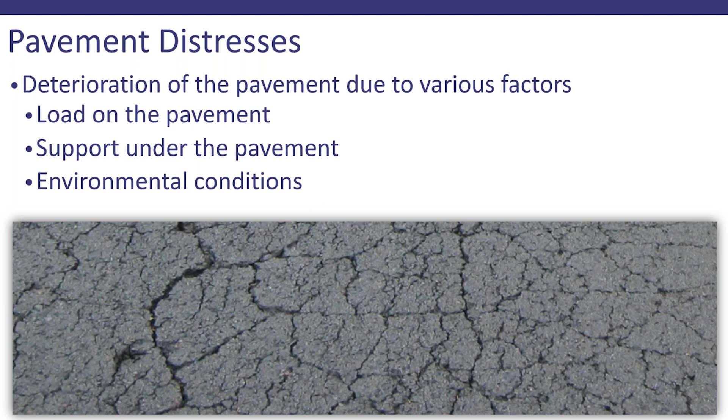All right, so we are going to be talking about pavement distresses and what to look for. As we know, when a new pavement is built, it's in great condition, or should be in great condition. And over time, that pavement is going to deteriorate to some extent. So there are a number of factors that contribute to that. One being the load on the pavement, so we put traffic on top of the pavement, that's a weight that pushes down on it. We're also dependent on the support from underneath the pavement that has to hold it up and carry that traffic load as well. And then we have environmental conditions that definitely play a big part in how long that pavement is going to last and what distresses show up.

So the first thing that they will tell you in any pavement design class is the most important feature of a pavement design is drainage, drainage, and drainage. I know some of you have heard me say that many times before, but drainage is probably the single most important factor in the longevity of a pavement, because water and pavements just are not friends. They don't mix, they don't do well together.

So you can see in the picture the types of distresses that we see. When we have a lot of water in that area, it softens the subgrade. It gets into those small spaces within the pavement structure, and we don't want that. So it causes a lot of deterioration. The first step in trying to combat those sorts of distresses is to deal with the drainage. If you have any type of distresses that you're trying to mitigate or repair, doing some type of corrective maintenance, if you don't first correct that drainage issue, you will see those distresses come back over time.

So when a pavement has any type of opening in the surface, water is going to get into those cracks. You can tell in this picture all of the cracks are highlighted really well. It's after a rain, but the crack areas are still kind of damp or darker looking from being wet. So right after a rain is a great time to go out and look at your pavements because it's easier to find those cracks and openings where water is getting in.

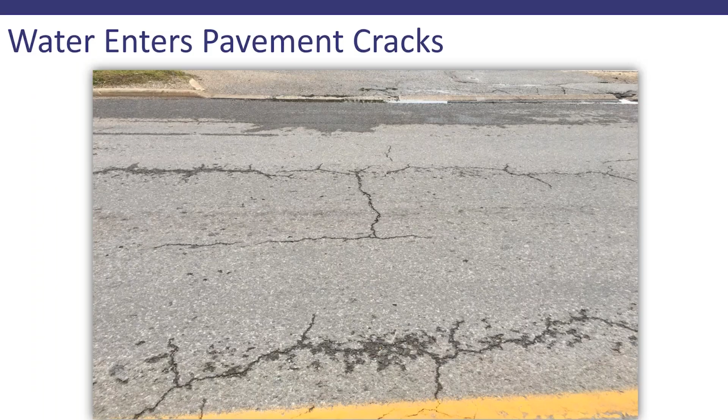Now, our pavement failure mechanisms, for the most part, asphalt is going to either crack or rut. We will also be talking today about concrete pavements, and concrete pavements crack. So those will be the main things we're looking at. You can see in the picture for the asphalt that we have both cracking and rutting in the same area.

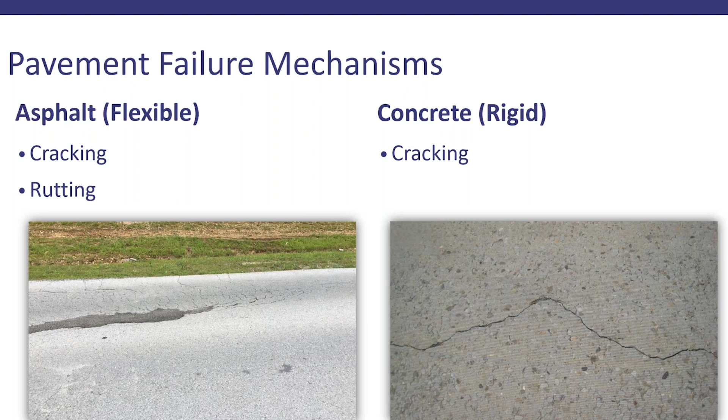So what that tells us is that when we look at the speed of deterioration, we can kind of be lulled into a false sense of security in that a new pavement does not deteriorate that fast. But once we start to see those distresses, they will kind of snowball on us and get worse a lot more quickly. So then we drop from that critical down into poor condition a little faster.

Now, every roadway is different, so we may have some that last a little bit longer, and we may have some that don't last quite as long. We're going to have to consider some major factors. If we have changes in our traffic levels, or if we have some really extreme weather conditions that year, that's definitely going to play a factor also.

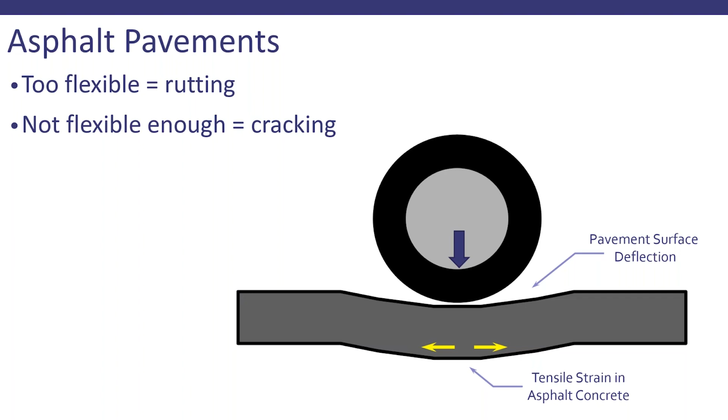Now, within our pavement structure, we have a number of layers. We have the surface, in this case asphalt. We will have some sort of a base material to support that. We might even have a subbase, and then below that we have the subgrade. Every layer plays a part in spreading out the load that we're applying from the traffic.

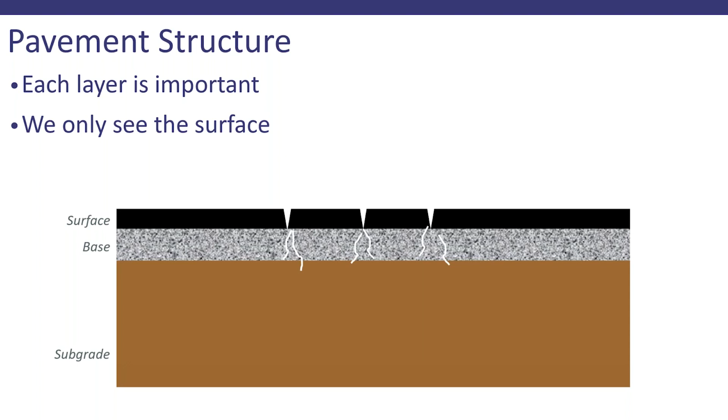But what we see is just on the surface. So if we have some things going wrong underneath the surface, it's hard to tell, because you can't see it—it's covered up by that surface layer. But when we start to get cracks, those are openings in the pavement surface that are going to allow water to get into that entire structure. So the openings get a little bigger, and we see water infiltration into those layers.

It goes further and deeper into the structure, and then we start to see things like subgrade failures or base failures. Those are kind of what we don't want to see, because the problem goes all the way through the entire extent of that pavement section. It's not just the surface that needs to be fixed, but the part we see at the top is the easiest to get to, and that's kind of what we want to be able to fix. So the sooner we can get to that cracking and keep the water from getting down and destroying that subgrade, the better off we are.

So those repeated bendings lead to cracking, and repeated deformation leads to rutting, and you can see how that will affect all of the layers of that pavement structure. So water's getting in and causing all kinds of problems.

Now, in trying to identify what those problems are exactly, we need to look at some type of pavement rating scale. So what is the condition of my pavement? How can I judge that condition? Well, there are lots of ways—some of them are really simple, some of them are really complicated.

There is a PCI, or Pavement Condition Index, that is outlined in a specification, ASTM D6433. What this does is step you through the process of rating your pavement on a scale of 1 to 100. So 100 is good, just like grades in school—the higher the score, the better. And so we're hoping to have higher numbers; we don't want to see those lower ones.

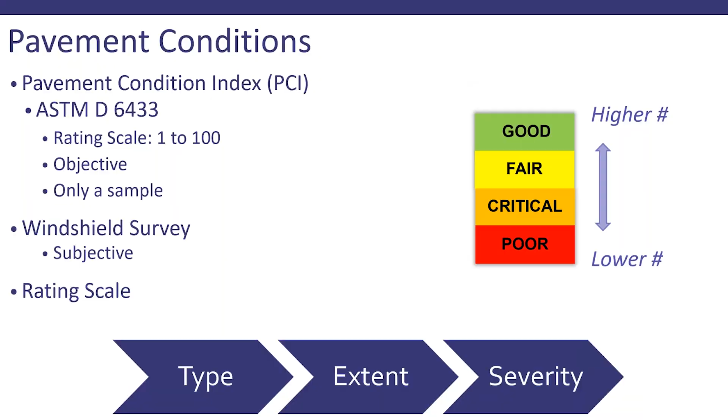Now, how do I get this data? We need to collect quite a bit of data, so I could go old-fashioned and get a clipboard and paper and pencil, take a tape measure out and start measuring some of this stuff, and that's a great way to do it. It's very valid.

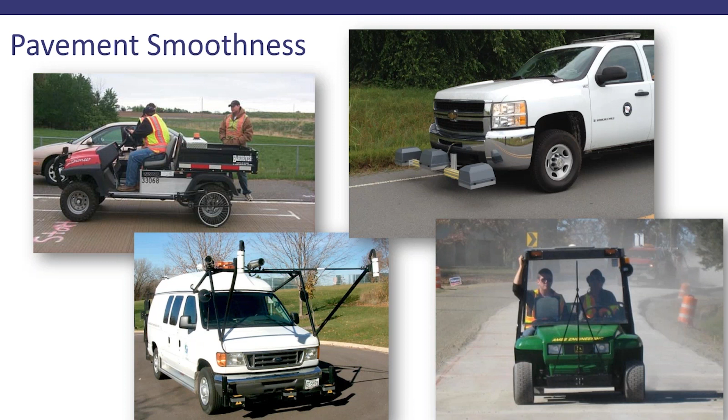Now, again, we've got to figure out what do we want to do, how do we want to collect our data, and make sure that it makes sense. If you want a very high level of detail, that's great - for instance, a state network. If you're a large municipality with lots of high traffic volumes, it's, I would say, definitely worth it. It's more expensive, but you get lots of data.

There is some danger in having too much data. What do you do with it all? Who's going to manage it? Who's going to monitor that? Who knows what to do with it?

So make sure that if you are paying the higher price for the more intensive details, that you have a plan to actually use that.

Now, at a lower level of detail, maybe your local networks that have a lot of low and medium type traffic levels, you can save some money. It's much less expensive. You don't get as much data, but maybe it's enough for what you need.

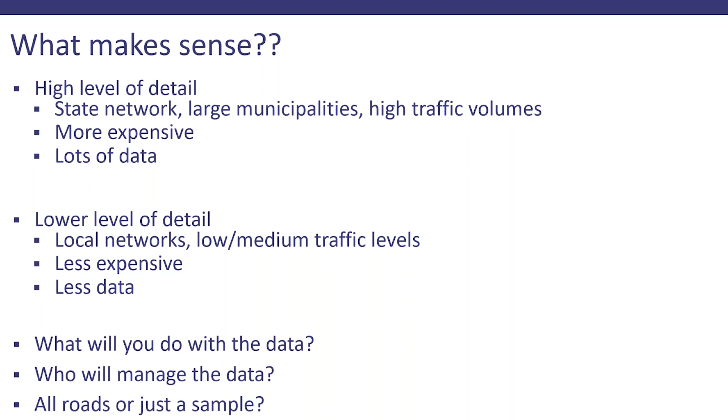So just make sure you think through the process of what you plan to do with the data, who's going to manage it, are you going to test all of your roads? Do you think that it's reasonable to just get away with a sampling of those roadways and all those types of things? Because the most important thing is that if you're going to go to the effort to do all of this, because it's not easy, you want to make sure that it is fruitful and productive and helps you make good decisions on how to improve your roadways.

Hey, at this time, let's stop and see if there are any questions.

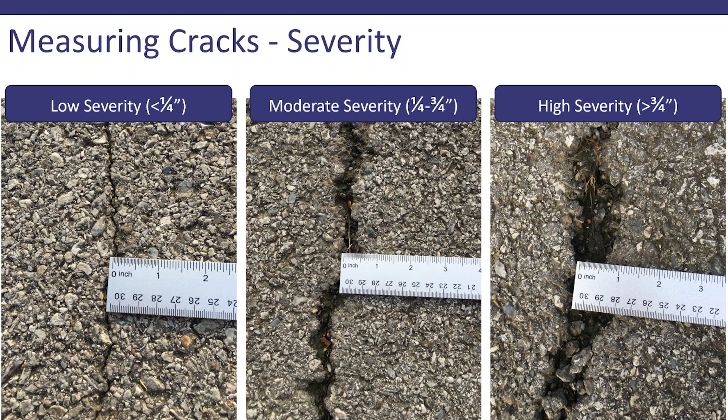Now, during the year, as the temperature changes, that crack width will also change. So that's something that you would also want to keep an eye on. Those cracks that tend to change quite a bit means that your pavement is a little more susceptible to temperature changes. So those close and open seasonally. Make sure that you're thinking about that based on the time of your survey.

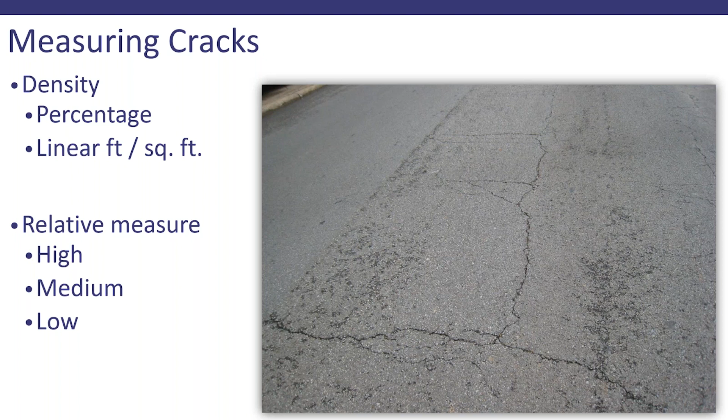And when we're measuring cracks, the density is going to be sometimes a percentage. It might be based on linear footage. It might be the square foot of the type of cracking that you see. And then we can also just kind of put it into a relative measure. Maybe we feel like it's good enough for us to just call it high, medium, or low density, and that's okay too.

Transverse cracking, those are cracks that are basically perpendicular to the center line. So they're going to run across the road side to side. But they're not going to be the ones that are caused by underlying concrete joints. That would be reflective cracking.

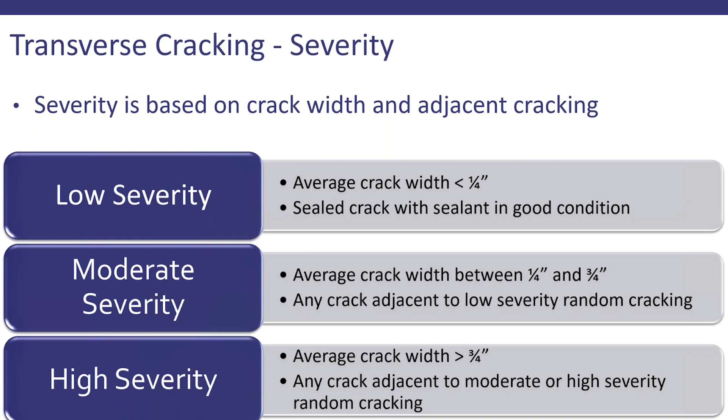So how are we going to measure this and keep up with it? We're going to record the number and length of transverse cracks, separate that by severity level, and rate the entire crack at the highest severity level present for at least 10%. The total crack length for a given crack is assigned to that severity level. So what we end up with is a listing or chart of how much we have at each severity level.

We're going to record the lengths of the cracks with sealant in good condition. Just for context, generally the rule of thumb is that at least 90% of that sealant must still be in good shape.

If the transverse cracking extends through an area of fatigue cracking — sometimes you'll see a transverse crack across the road, but then there's a spot that's got alligator cracking or fatigue cracking — then the length of the crack within that fatigued area is not counted, because we're going to count it with fatigue cracking, which is considered a worse type of cracking. And anytime you see a crack less than a foot long, we're not going to worry about that — that one does not count.

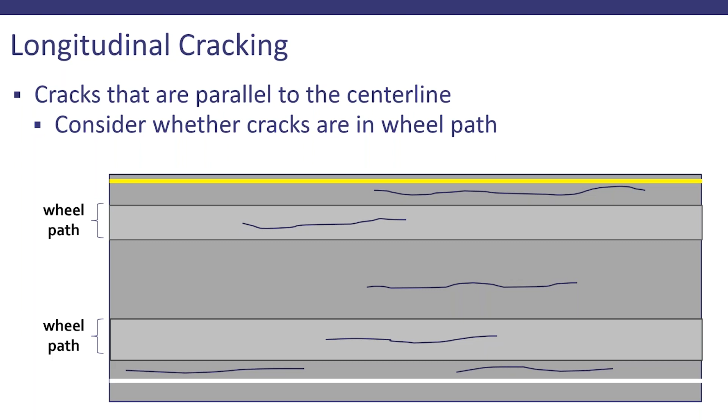Next we're going to look at longitudinal cracking — these are cracks parallel to the center line, so they run long ways down the road. The biggest thing to consider is whether those cracks are in the wheel path or not. If they are in the wheel path, they're more likely to be load related, because that's where traffic sits and where the actual load is applied. If they are not in the wheel path, it's going to be more of a non-structural issue.

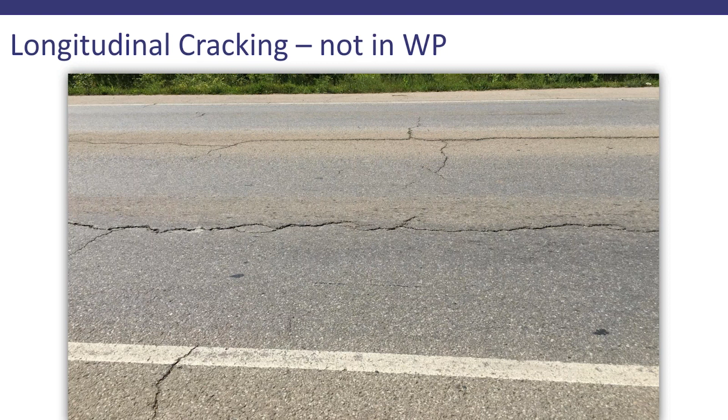Now for longitudinal cracking, we've got kind of the same scenario. Low severity is less than 1/4 of an inch, same deal with the crack sealant being in good condition. Our moderate severity will be 1/4 inch to 3/4, and high severity is more than 3/4 of an inch wide. And then we have some considerations of that crack being adjacent to random cracking as well.

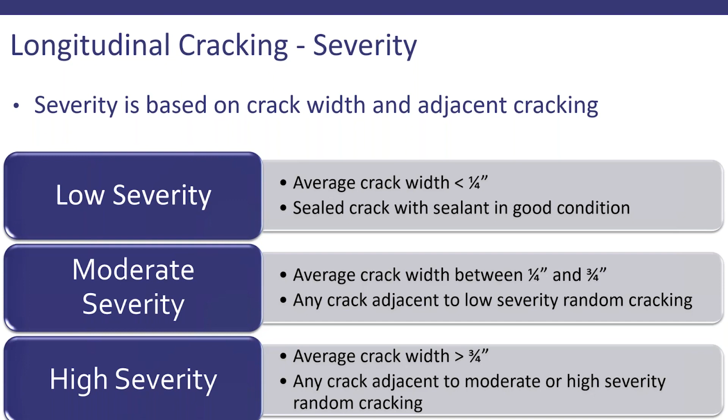When we're looking at longitudinal cracking, we're going to look at those that are in the wheel path and record the length of those cracks, separating that by severity level. Any longitudinal crack associated with random cracking, meaning cracks running in different directions, is more like alligator cracking, so we're actually going to rate that as fatigue cracking, separating it out from the longitudinal portion.

If it's a longitudinal crack that meanders quite a bit and has a quantifiable area, we're also going to rate that as fatigue cracking. If it's outside the wheel path, we're going to record that separately, again recording the lengths and separating by severity level.

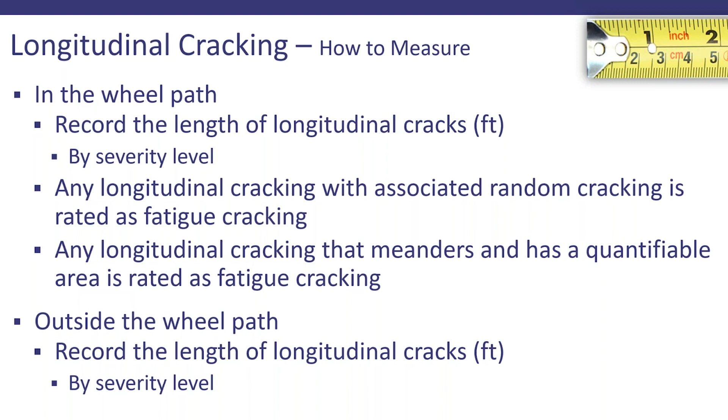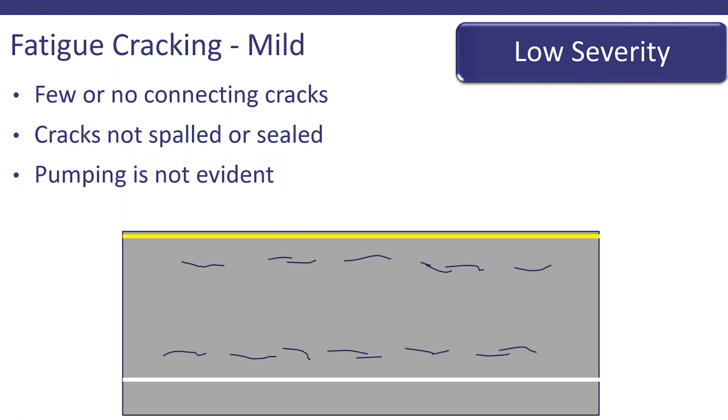For moderate severity fatigue cracking, we're starting to see some of those interconnecting cracks forming a pattern. The cracks may be slightly spalled, meaning the edges of those cracks have broken so it looks deteriorated—not a clean break, kind of mottled. Those cracks may be sealed, but again we're still not really seeing any pumping.

For our more severe level fatigue cracking, we've got interconnecting cracks forming a very obvious pattern. It starts to look like an alligator, so that's why a lot of folks call it alligator cracking. These cracks may be moderately or even severely spalled, may or may not be sealed, and at this point there's a higher likelihood that we are seeing some pumping.

Here's another example. This is some pretty defined alligator cracking, so severe level fatigue cracking. Again, we do see the evidence of that subgrade material being pumped through to the surface, and after that pavement dries, we're left with that residue, so it has a dirty look to it.

Here's one where we do not actually see pumping, but that is some extreme fatigue cracking over in that lane—lots of interconnected cracks.

In terms of measurements and how we record this, we're going to report it in either square feet or square yards, separating that by each severity level. If you're doing that and really can't figure out which is which, or maybe part of it looks medium and part looks severe, go ahead and rate it worst case—the highest severity level that you see in a particular section, go ahead and assign that.

Fatigue cracking is interconnected cracking, but it's very much related to a load-based problem. Block cracking is kind of like that in that those cracks are interconnected, but it's not necessarily load related. In fact, it does not start out that way at all, but it's more of a block shape.

You'll see some squares, and it's not going to be super straight lines, but you'll notice a pattern of similar size, either squares or rectangular pieces that are kind of separated out. Those blocks can be anywhere from 1 square foot up to a 10 by 10, 100 square foot block. It just depends on the pavement.

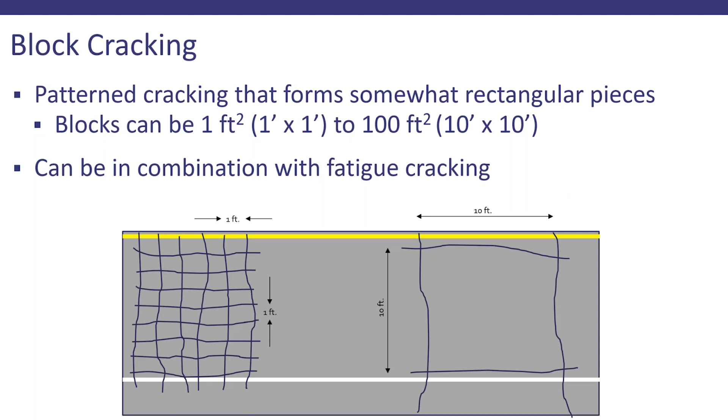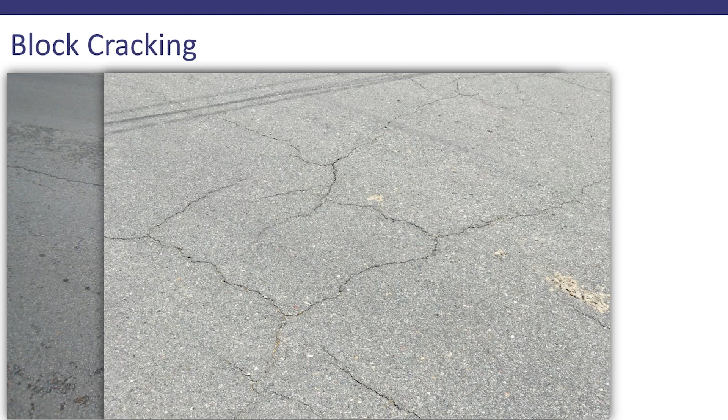In some early stages of block cracking, we start to see a little bit of that non-structural longitudinal cracking. We see transverse cracking, and then a more regular pattern develops, but it's not isolated within those wheel paths. It's important to watch this over a period of time and keep up with it, not just check it once and be done, but get an idea of how it's changing and modifying.

I think the most typical size blocks are going to be 2, 3, 4 foot by that same size, so kind of in between those extremes that I showed you on the diagram in the previous slide.

For block cracking, our severity level is going to be based on the crack width and the adjacent cracks, much like what we've seen before. Average crack width for low severity is less than 1/4 inch. These may be sealed, which means you can't really see it to figure out the width, but sealant being in good condition is a good thing. Moderate and high severity, again, is going to be based on the width of the crack as well as that adjacent random cracking.

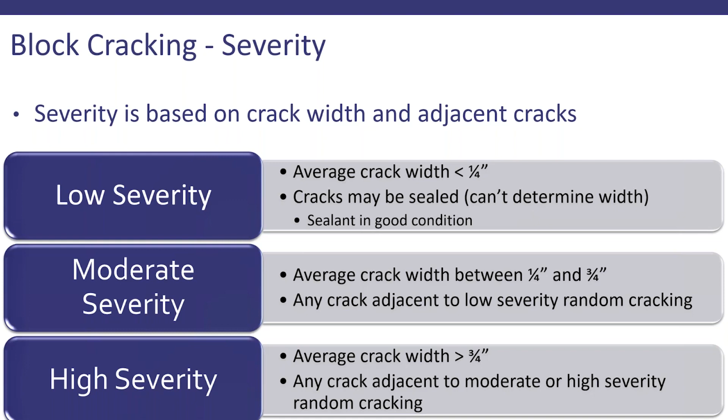Now, how do we measure block cracking? We're going to record the square feet or square yards at each severity level, but one caveat is that to consider it block cracking, the length of the affected area should be at least 45 feet long. So if you have just a very small spot, maybe 10 or 20 feet long, that looks like block cracking, that's not actually going to count as block cracking unless it's consistent over at least 45 to 50 feet.

If you have fatigue cracking that is also in that area, you're going to reduce the block cracking area by the area that's fatigue. So you're going to have to separate out which part you call block and which part you call fatigue.

Right now, reflective cracking — we've already mentioned this one. This is where you might have an asphalt pavement on top of an older concrete pavement that was jointed, and those cracks from the joints reflect through. So we need to know how can you tell the difference between transverse and reflective cracking? Sometimes it's really easy, sometimes it's not so easy to tell the difference.

If you have some information on the construction history and you know it used to be a concrete pavement, that is wonderful information to have, but you don't always have that. When an asphalt surface is placed on top of that concrete, whatever gap is underneath it is a break in the support, and that weak point is why it will always reflect through. Usually there's no magic that will fix that; you will always have it. There are some treatments that can slow it down, but nothing that's a magic fix.

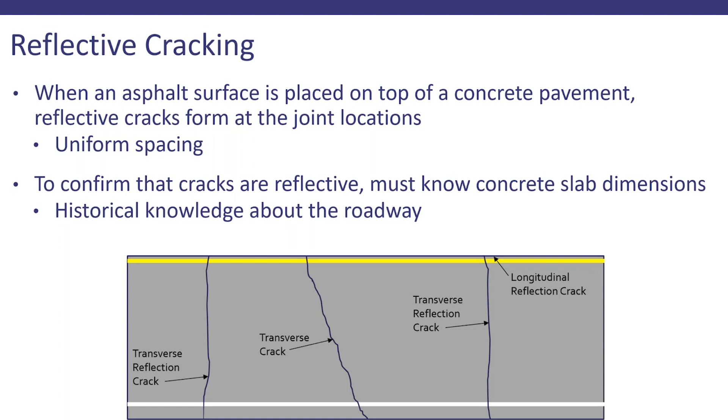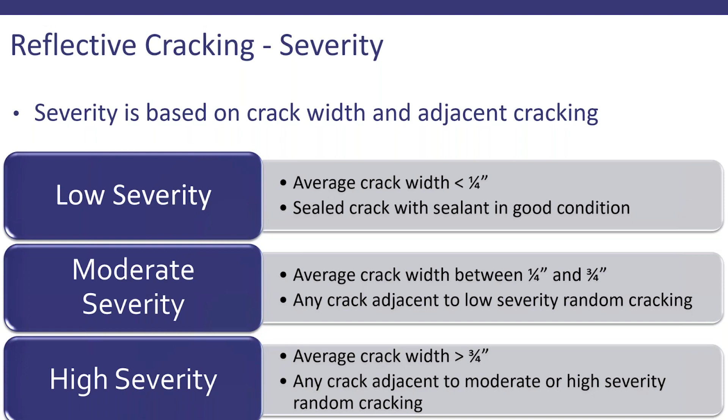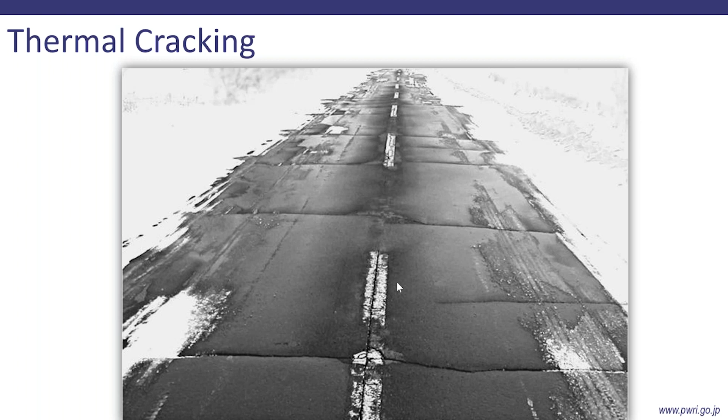And then we might also see thermal cracking. This is cracking that occurs due to temperature changes, and really just the shrink and swell of that ribbon of asphalt as it moves through that area. A lot of our designs over, I would say, the last 20, 25 years, once we started using SuperPave and paying more attention to the temperature ranges for the binder, we're seeing less of the really true thermal cracking issues.

We might also see edge cracking. This is something that is going to apply to the pavements with unpaved shoulders. Usually it's going to show up as kind of a crescent or a little bit of a curved breaking off section right at the edge of that pavement, because when we don't have a paved shoulder, we don't have that lateral confinement or lateral support. So it's easy for that edge to kind of crack and break off. But we're going to classify those for anything that is located within 2 feet of the edge of the pavement, and this will include longitudinal cracks that are outside of the wheel path.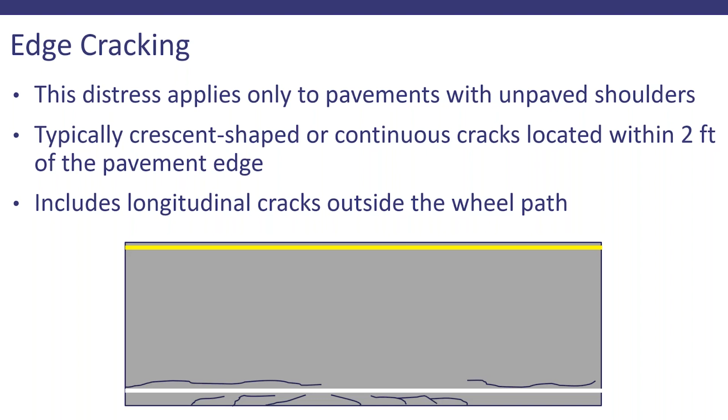Low severity for edge cracking is going to include cracks that don't have any breaking. There's no loss of material yet; we're just seeing that the crack is there. Moderate severity will be where the cracks are starting to break up a little bit, up to maybe 10% of that affected length might have lost some of the material. And then when we're losing more than about 10% of the edges, we're seeing chunks break off of that edge, we're seeing a lot of breaking up — that is going to be considered high severity.

So you can see kind of what that looks like. We do have a little bit of breakup there. We're going to record edge cracking in terms of the length of the affected pavement edge — how long of a span is that problem happening. We're going to have that separated by severity level.

Okay, and here's one that has quite a bit of breakup at the edge. None of that is so far that it's over into the wheel path, so it is all considered edge cracking.

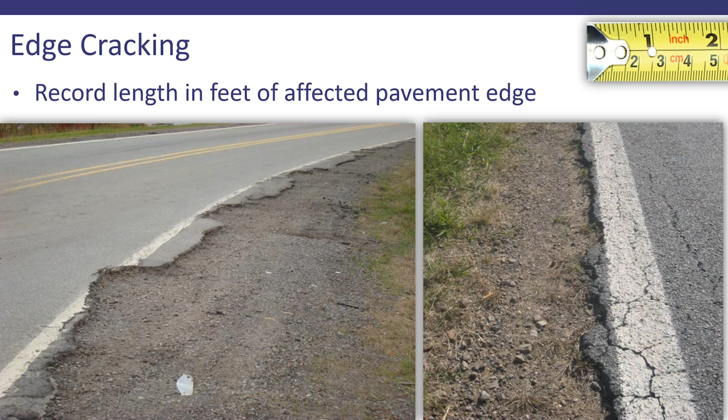Another thing that we might need to document on the edge of the pavement is that lane to shoulder drop off. When we don't have paved shoulders, we have the potential for a vertical differential there where that gravel or crushed material that's pulled up to the edge will tend to wear away, especially if we have traffic that's getting over on the edge and wearing it down. So when that difference in elevation is more than about 2 inches, there's a definite safety issue at hand. What we want to do is record that elevation difference so that we know what that is. So if you're seeing any significant drop-offs, make sure and record that.

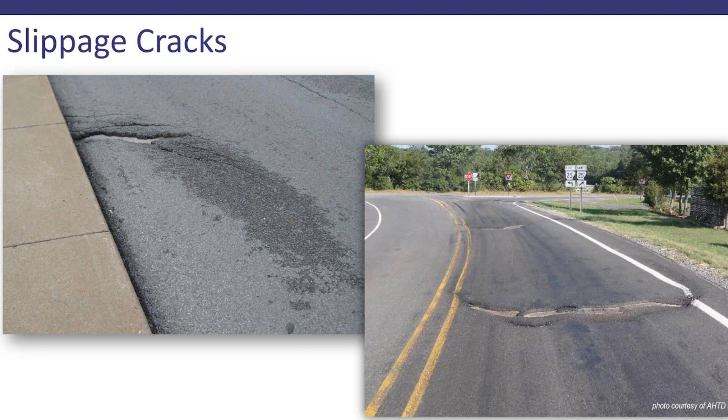This is a little more extreme case. We've got some tearing of the asphalt, and then a massive crack in the picture on the right, and you can see how that's holding water. So water is the enemy — this is definitely what we don't want to see on our pavement.

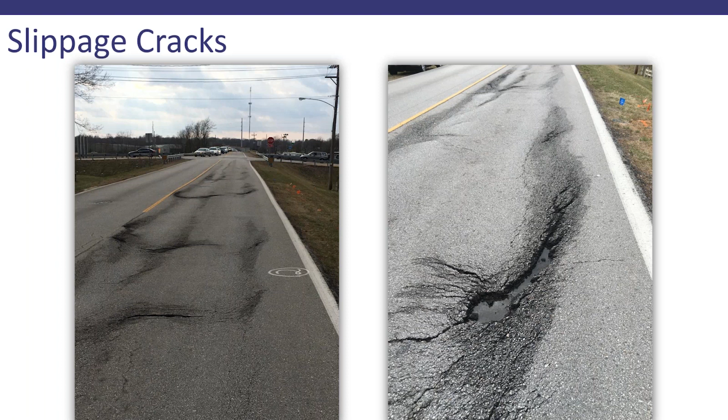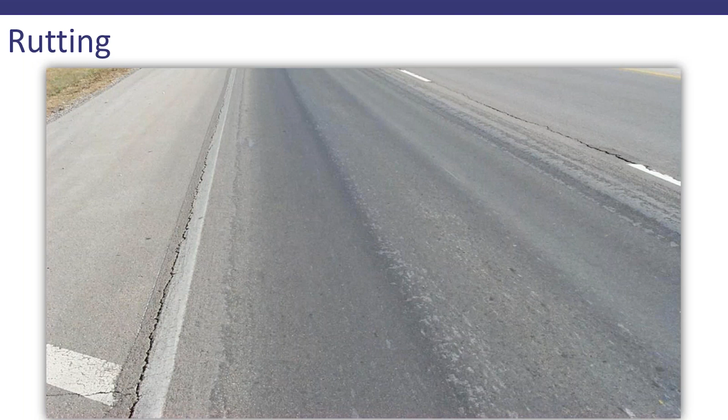All right, now let's talk about asphalt rutting. Rutting is pretty self-explanatory, we know what that is, but it will have some longitudinal depressions in the wheel paths of that lane. So you can see here some evident differentiation - it's not a smooth cross section of that roadway.

This is a more severe case of that. We've got some definite issues here. You can tell where the loads are being placed, and it's really just pushing that mix around and moving it. So we have some low points in the wheel paths.

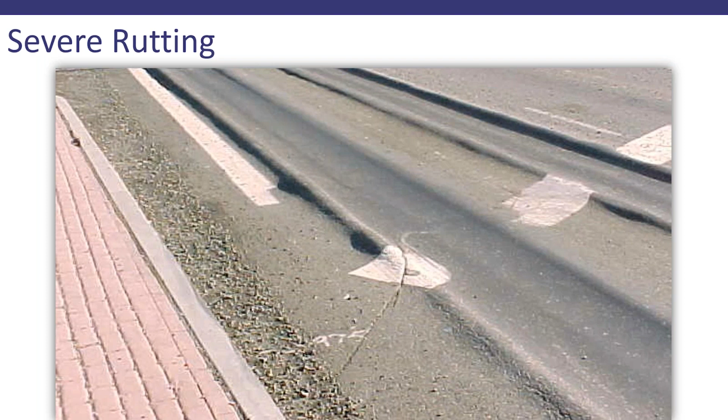Now, the two ways that rutting can happen: the first is in the subgrade or the base layer, and so really what happens is that the deformation happens well below the surface. So the subgrade might be weak, it might become soggy and saturated and a little squishy, and then we put that traffic load on it. And so we see that subgrade deforms, or it could be in the base layer where it deforms, but typically it's going to be in the subgrade. We specifically designed the types of materials that we're going to use for the base and for the surface, but we tend to use whatever's there in terms of subgrade because it already exists. So unless we do some type of a modification or improvement to that subgrade, we're really just using that natural resource. And a lot of times that will be susceptible to some deformation when it gets wet, especially if it has much clay in it.

Now, the other option would be that the subgrade's fine, the base is fine, but that asphalt mix is just a little bit too weak for the type of traffic that we're going to put on it, and it moves around. So in the case where we had - let me actually go back - in this, if you look at that original cross section with the straight line, everything that moved down to make the ruts went downward, nothing went up. On the other hand, if the mix is the problem, then whatever moves down here, it's going to hit something solid. It can't continue to go down, so it's going to move the mix side to side. So we have these extra heaps of asphalt that have moved to the outer edge of the wheel path.

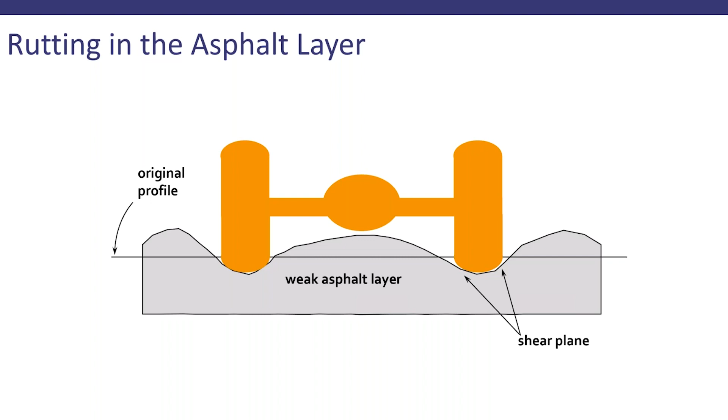Now, in terms of measurements for rutting, what we really want to know is how deep is that rut? Again, it is a longitudinal depression in the wheel path. Officially, severity levels are really not assigned because a rut has safety issues associated with it. So if there is a rut, water can sit in those areas of the pavement and cause hydroplaning, it could freeze - lots of things that deal more with safety. So officially, there are no severity levels.

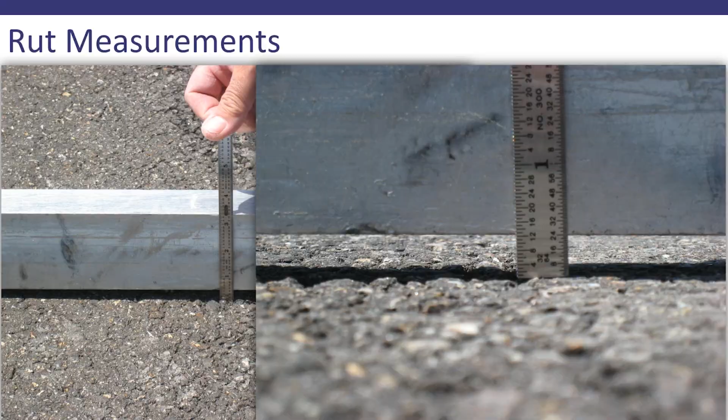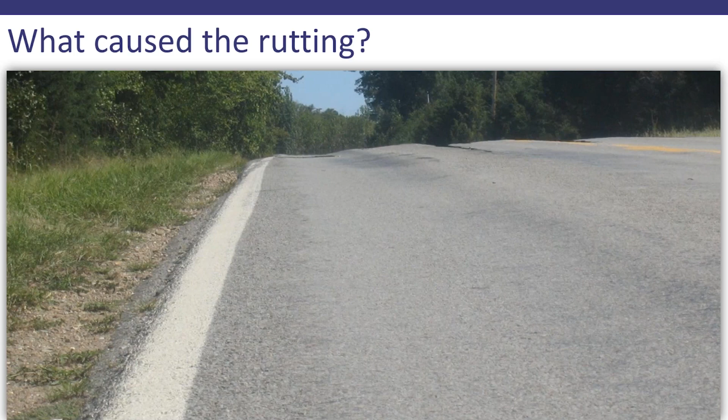Now, based on core samples, we also found that there was some subgrade issue, and we had to deal with that as well. So this is really a combination problem, but those are a couple of the things that you can see right off the bat in the picture that would identify mixture rutting. It's easy to tell you, with that line, here was the original profile, but when you walk out onto the pavement, that line is not there. You have to just be able to look at it and tell where it was originally, and that's not always the simplest thing to do.

A related distress that's kind of like rutting is shoving. This is displacement of an area of the pavement surface. That's usually when you have heavy traffic putting on the brakes or maybe accelerating, but they're doing something that's changing the forces on those pavement sections as compared to where there's just normal driving.

So this is really common to see on hills. You might see it laterally on curves and coming to an intersection. So as that truck comes down, it puts on the brakes and it's actually shoving the asphalt forward based on that friction.

In terms of measuring, we're just going to record the number of times that it happens and how many square feet it affects, because this is usually going to be an isolated area in a curve near an intersection or something like that. It's not going to be spread out throughout the entire traveled way.

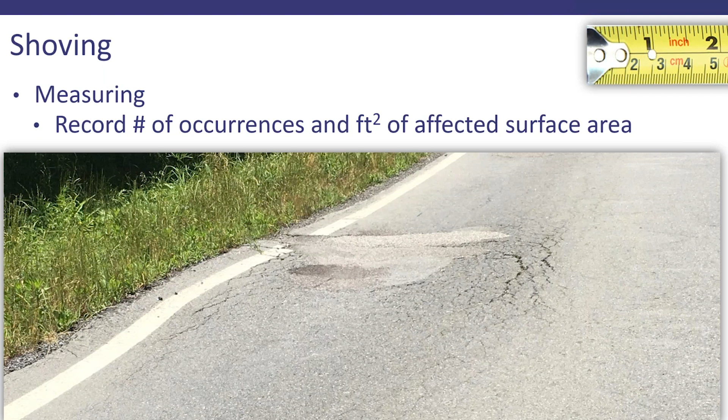Here's another example of shoving. You can see how the surface of the asphalt looks kind of lumpy. That is just the effect of traffic coming to an intersection. So you've got both the braking action and then also the acceleration. At this particular location, it's uphill as they're accelerating to take off from that stop sign, and at an angle that's pushing the asphalt around.

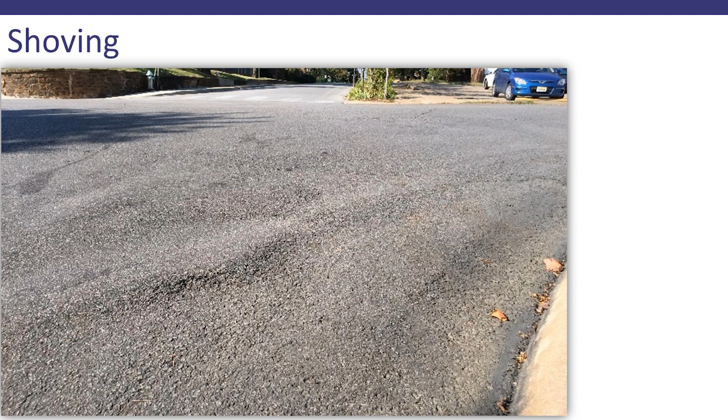And then another example here where we're going downhill in these lanes that are more on the left side of the picture. You can see some more extreme effect. It feels like washboarding, but it's just some shoving as you come down the hill, approaching a stoplight, and it always seems to be red right there. So everyone has to put their brakes on. They push the material forward, and then it just makes it lumpy, makes it rough. And then the rougher it gets, the more of an effect it has for the next bit of traffic that comes along. So it continues to get worse.

And then here's an example of lateral shoving in a curve section. The best way to identify this, again, is to look at the stripe. The stripe was not painted in a wavy format, but it looks that way now. So what's happened is traffic is actually pushing that mix around. It's not super stable. So for that, we're going to look at the square footage, figure out how much of that pavement is affected, and record it.

Now there are a few other asphalt distresses to look at. Bleeding and flushing - this is really just excess oil or binder. If your mix was too rich, compacted too tight, and that bled to the top, this can create a loss of surface texture. This is a safety issue, so we're really not concerned with severity levels.

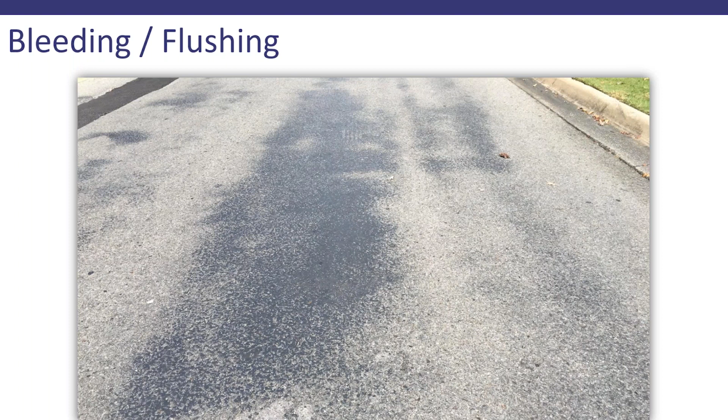In terms of measurement, we're going to record the square footage of the affected surface area.

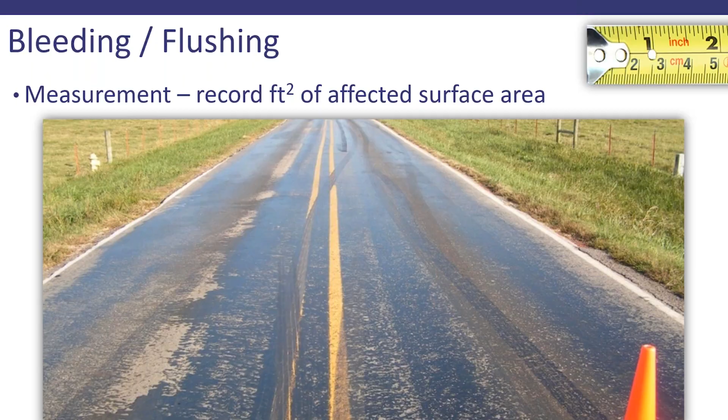Now, the biggest issue with the bleeding and the flushing is skid resistance. So rather than looking at something like a severity level based on a measurement of what it looks like, we can actually measure the skid resistance itself. There are a couple of things at play when we talk about skid resistance: one is microtexture, one is macrotexture.

So it's a relative measure that will tell you which pavements have more or less skid resistance. That really deals with the microtexture, which is kind of the grit and the grip of the aggregate particles themselves. Now the mix will have a macrotexture - there will be some little spaces, that bigger texture, which is why it's called macrotexture. But those are the spaces within the surface of that mix where water might be able to sit temporarily during a rainstorm to keep it from being right on the surface. If everything is super, super smooth, there's no reservoir area for that water, and so it's just going to come in contact with the tires. But if we do have a good amount of macrotexture, that water can live somewhere until it can run off and keep it from breaking the bond between the vehicle tire and the pavement surface.

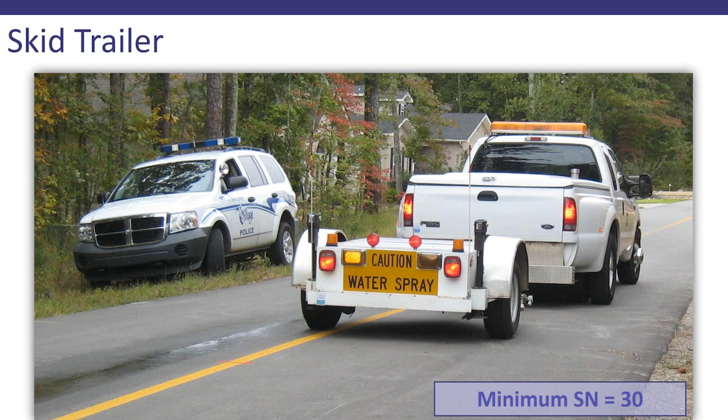So the motor gets it going. There's a hose to spray some water on the pavement, so it's like a wet skid test, and then it drops that fixture, and the rubber skids actually screech, so it will scare people out in the field when you're running this. But it will run, it will drop, and it will give you a skid number based on that wet test. It's a portable type of test, kind of cool. Gives you a good relative measure as well.

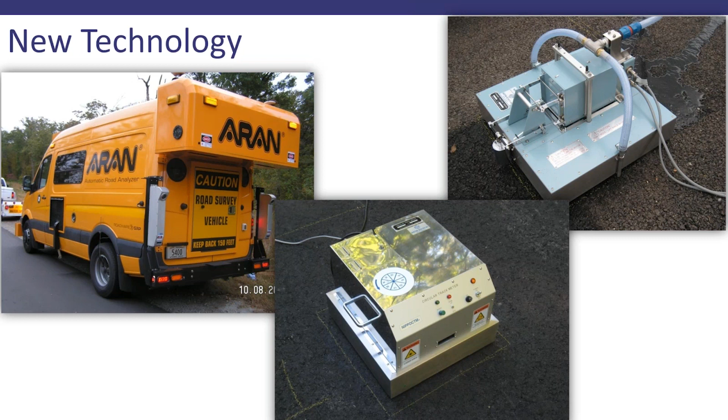Okay, another place where we might need to do some friction testing is when you see polished aggregate. This is where the surface binder has worn away, the aggregates are exposed, and we would like to think that our aggregates still have a lot of texture, both micro and macro texture, to provide that skid resistance. But some aggregates get smoothed off or polished by the action of traffic, so then we lose that friction. Again, we're not really going to look at severity levels here. We could do some skid testing and determine whether it's good or not good, but it's a safety issue, so we're not going to have a low, moderate, or severe.

When we have polished aggregate, we're going to look at the square footage of the affected surface area, and we're not going to count any sections. Sometimes we'll have something that's got preventive maintenance applied, or maybe we've got a crosswalk with some different texture. That part is not going to count.

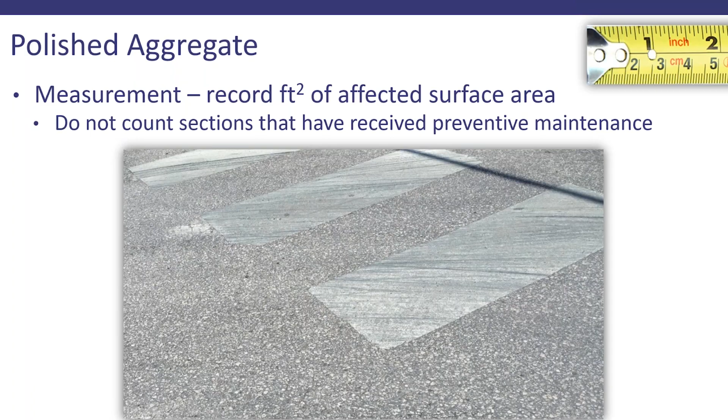We might have some pavement sections that exhibit raveling or weathering. This is where we have a loss of surface aggregate as well as binder. Sometimes we lose the fine aggregate, sometimes we lose fine and some coarse aggregate, and sometimes we lose coarse aggregate too. So it could be all of those things. But if you look at this picture, you can tell it didn't start out with that type of texture. We've lost some parts of that mix. So typically we'll see this in older pavements. Weathering just happens. It's out there for lots of years, in the weather, and then it does start to ravel and lose some of those particles.

When we're measuring this, we're going to look at the square footage of the affected surface area. We're going to make a note of the type of aggregate that appears to have been lost. But this is not something that we're going to rate on chip seals. Now, we do have raveling on chip seals, but when we're doing our pavement surveys, we're not going to worry too much about those details on that type of road. But you can see there are two different examples here in the pictures that have very different textures, and that gives you an indication of what types of aggregates are coming out of that surface.

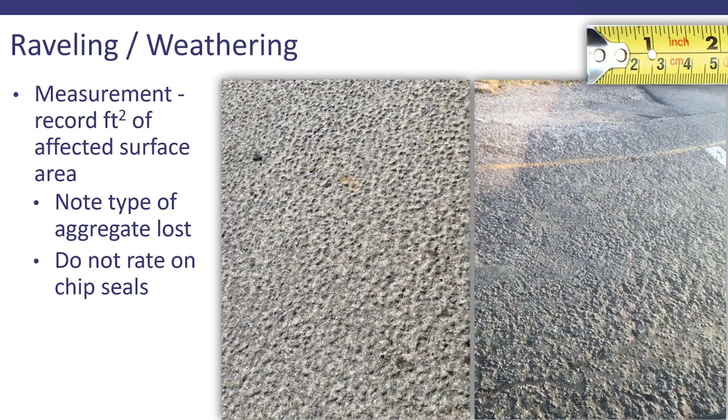And then you might see something that's very closely related. These are pop-outs, and this is where you're just losing those larger coarse particles. If that's happened over an entire area, it's going to have a really rough-looking texture. But just as a close-up here to see what that looks like, it looks like one big rock just sort of got plucked out of there, and that is exactly a pop-out.

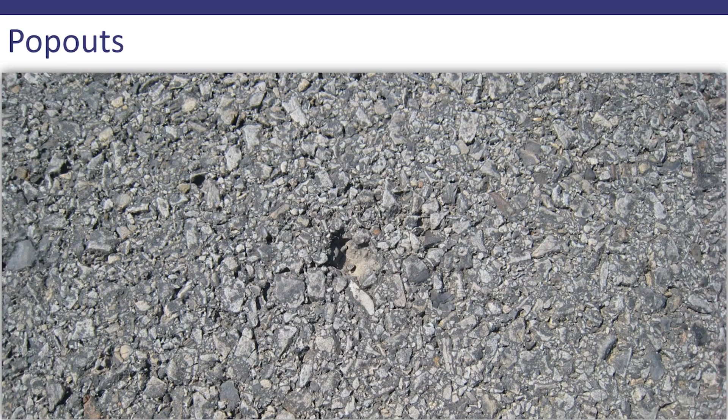Okay, we're going to need to note things like water bleeding and pumping. So if we see water seeping from underneath the pavement and it's coming up through those cracks, that's definitely something we want to notice. At that point, we've already talked about how some of those fines may come up through those cracks and be left on the surface, just kind of looks dirty. So we're going to measure the number of occurrences and how much length of the pavement is affected. And we're only going to count it if it's 3 feet or more. If it's just a small spot, we're going to ignore that.

Okay, so we might see that it's just water that's coming through, and we have to pay attention and know what kind of weather has been happening. If we see something like this, you need to know, did it just rain and everything else has dried, but there's more water near those cracks, which is what helps them show up. But if it's just that it rained and this has not dried yet, that's different from it hasn't rained in 3 days and this is still wet. That's an indication that water is pumping back up through from the bottom side. So it's a different action.

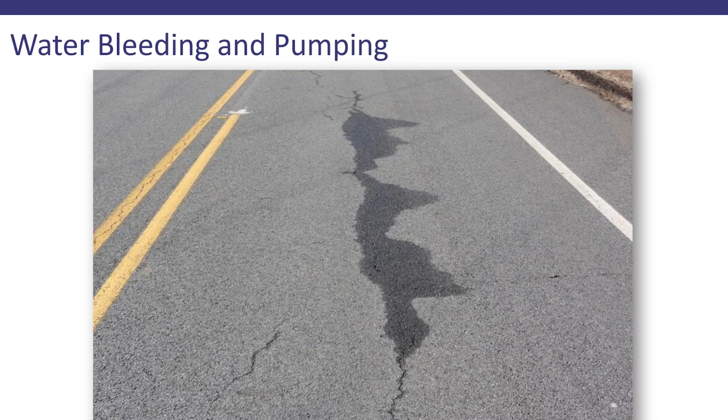Okay, then we're going to also measure potholes. This is kind of a bowl-shaped hole. Y'all know what a pothole is, but different sizes, different depths. Anything less than about a 6-inch diameter is not going to be considered, but we need to know the depth, because that's going to determine our severity. Low severity is less than 1 inch, moderate severity is 1 to 2 inches, and high severity is anything more than 2 inches.

A lot of times our potholes are dependent on the layer of pavement that failed. So if we had some fatigue cracking on a pavement with a 2-inch overlay, 1.5 to 2 inches is a typical overlay depth, and it's just that portion that has broken apart and popped out that leaves a pothole. That often indicates the severity, because if it's just that layer, it's probably going to be a moderate severity pothole. But if there's been more deterioration and it's deeper, maybe the underlying layers have also come out, and then we're going to be in more of a high severity.

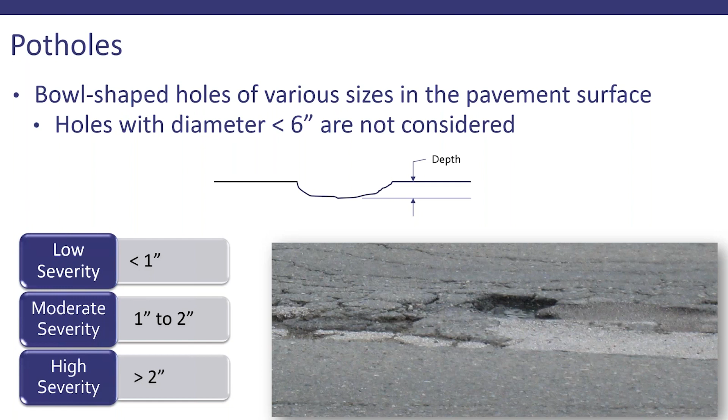There will be places that were potholes or different deteriorated portions that we patched previously, and we need to look at the condition of those patches. That also affects the overall quality of the pavement. A patch is a portion of pavement that's been removed and replaced, or additional material applied after original construction.

We want to look at these and see what distresses they have, just like we would look at any other pavement, but we're going to categorize these in a separate section. Low severity has any low severity distress of whatever type. For moderate severity, we're going to use the criteria for that particular distress, as we call it low, moderate, and high severity.

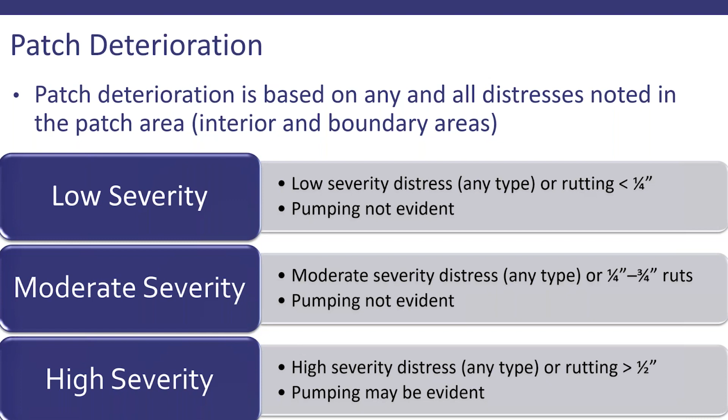In terms of measurements, we're going to record the number of patches, and then we're going to also look at the number of square feet of the affected area for each severity level, and any distress within the boundary of that patch is going to be included.

A distress that's usually pretty hard to see or truly identify without coring the pavement is called stripping. This a lot of times will show up from the surface and look kind of like rutting, but it's where the binder films within the mix are separating from the aggregate. Asphalt is rocks, and the oil coats the rocks and sticks them together. But when the oil comes loose from the rock, the lighter color is really just broken rock, but you can see a lot of places where it's brown. That is where the binder films have actually separated from the aggregate surfaces.

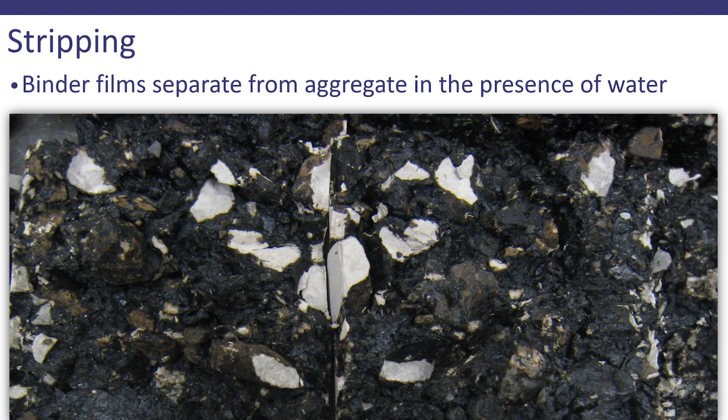So what that means is we don't have that adhesion, we don't have it all locking up. And so it gets a little extra mushy, and that's where we see rutting at the surface. But it's not our traditional type of rutting—it's specifically because we've lost that adhesion between the materials.

All right, that's all on asphalt distresses. Are there any questions? Looks like a pretty quiet bunch today—no new additional questions.

All right, well, we will keep moving. And y'all can probably tell I'm a little bit under the weather, so I apologize for the sound quality of my voice, but we'll do the best we can and keep moving.

So at this time, I've got some questions for you. If you would use the questions pod to type in your answers—can you name that distress? I'll give you a minute to look at this one and see what you think caused this actual distress.

All right, good answers coming in. Looks like we've got a subgrade failure, and that is most often due to water. So it's a low spot. We would possibly put this in the category of rutting because we do have a depression here. We also have the appearance of some fairly high severity cracking, looks like fatigue cracking because those cracks are interconnected, but it is in an isolated area.

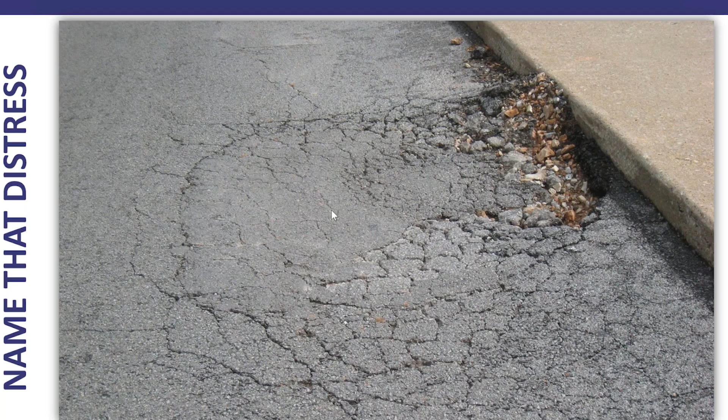Now looking at structural versus non-structural, we hope to see non-structural issues because we have a chance to fix those before they become structural problems. Structural problems are deep problems, they require a deep solution. We're going throughout the extent of that entire pavement structure to truly provide a substantial fix.

So the kinds of things that are a little more user-friendly will be transverse cracking, longitudinal cracking that's not in the wheel path, block cracking, raveling and weathering, bleeding and flushing. Mixture rutting is also one that's really limited to that top layer. These are all things we can fix from the top side.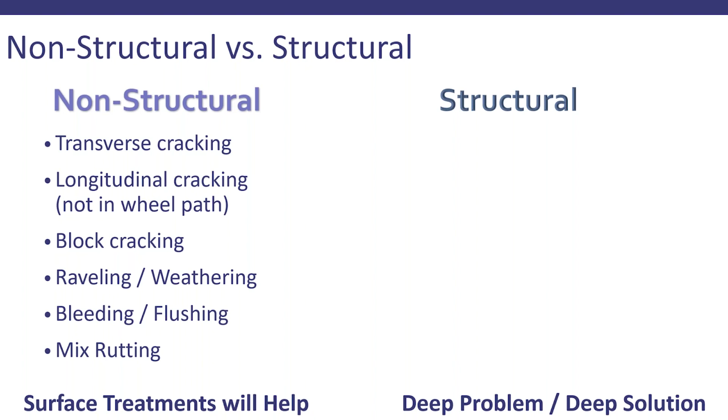When you're looking at some of your treatment options that are more surface related and less of the rehabilitation, reconstruction kind of things, this is where you can catch it early and get some things done for a much lower cost. If you wait longer, or if those distresses are already structural, you're going to see things like longitudinal cracking in the wheel path, alligator cracking or severe fatigue cracking, your base failures.

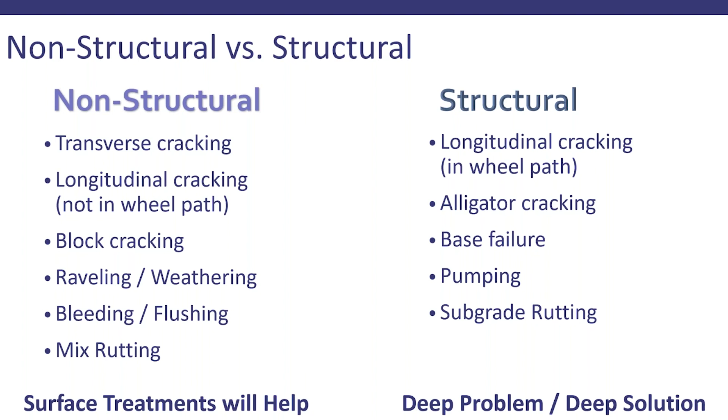Pumping is an indication that things are not all well with the pavement structure, because we're losing part of the subgrade and it's coming to the surface. And then also subgrade rutting. So again, these are things where we can put overlays, do some patching, repairing, that will buy us some time, but it's not truly going to bring us back to a condition where we can expect significant longevity for the life of that pavement.

Now we're going to switch gears a little bit and talk about some concrete distresses. Really, concrete just breaks, it cracks. Concrete is a rigid pavement. It contains water, cement, sand, and rock, maybe some admixtures, but the water and the cement really do the work. The cement is the magic, it reacts with the water. There's a hydration process that creates that paste which hardens around the aggregate. So the aggregate is really the filler, and the cement gives it all of its fanciness, all of its strength.

So when we have deteriorations, that rigid pavement doesn't bend, it doesn't flex, it doesn't rut, it doesn't do any of that, it just breaks. So we see a lot of different types of cracking. For concrete distresses, we're going to look for corner breaks, joint seal damage, joint spalling, faulting, map cracking, scaling, polished aggregates, pop-ups, pop-outs, blow-ups, and another one we might see is alkali silica reaction.

Now, corner breaks are kind of common, because typically when we have concrete pavements, we're going to put joints in. Concrete cracks, and concrete's going to crack no matter what we do. So the way we attack this is to say, hey, we know it's going to crack, let's go ahead and put in our joints. We'll saw cut that during construction to control where those cracks go. If we can make them nice and straight, we're going to preserve the functionality of that pavement for a longer time. So we put in those joints and force the crack to happen at that location.

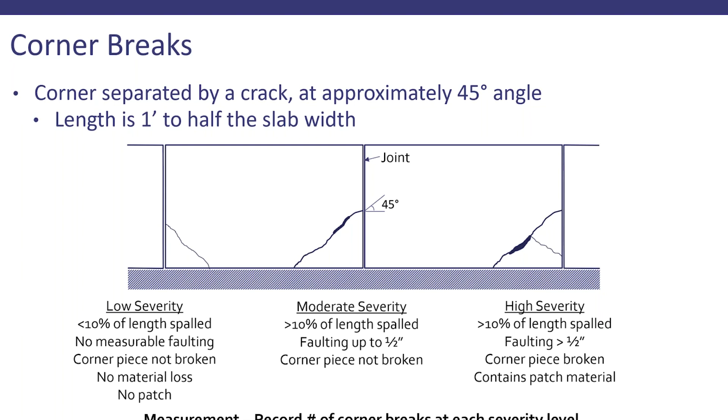And then high severity, we've got more than 10% of the length spalled, and then faulting of more than a half of an inch. The corner piece may be broken, which means there'll be another crack within that triangle, and there might even be some patch material in there where there's been previous attempts to fix that.

Now in this case, we've got another one. You can see a pretty good break there, and then also some spalling, some deterioration, and loose material within that broken spot. A little bit of patch material was attempted there, and you can see the remnants of that as well.

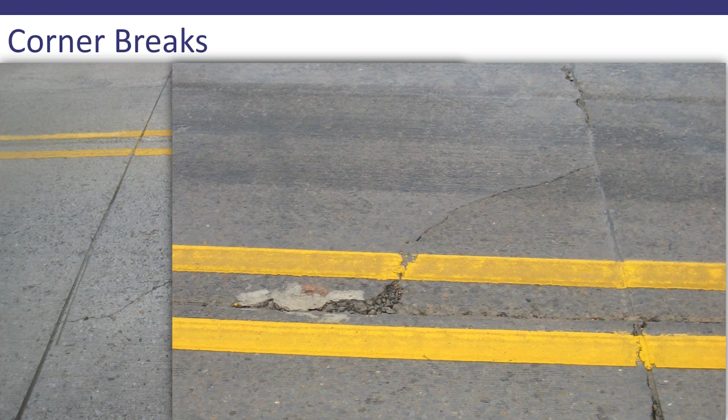Now, durability cracking, also referred to as D-cracking, is where we have some closely spaced crescent-shaped, kind of hairline-looking cracks that run around the edges of those individual slabs. So at the corners, we might have some of those really thinner-looking cracks.

So low severity, really no missing material, it's kind of a tight pattern. But then when we start to see more of a well-defined pattern and maybe a little bit of missing material, that puts us in the moderate category. And then if we have really developed cracking with missing material, that's going to be considered severe.

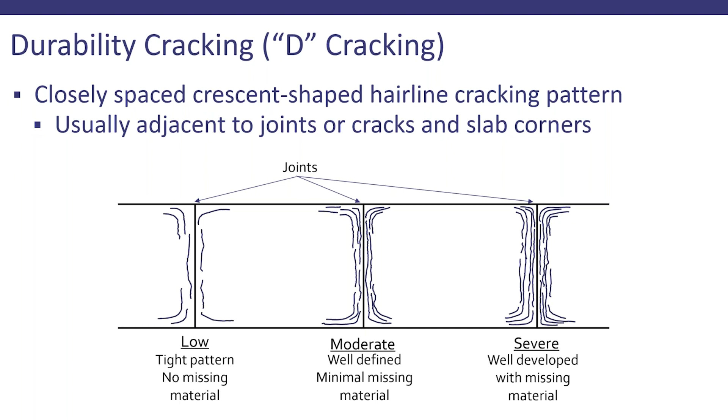This is an example of the kind of thing. It's a very definite pattern. You can tell those crescent shapes that run right around the corners. It's in the areas that would have corner breaks, so you typically either see corner breaks or you'll see the durability cracking.

And then faulting, and faulting is also related to pumping. What you see here is that those slabs, if they don't have dowel bars or some kind of a load transfer device built in, then we're going to see that that slab is completely independent of the one that comes next as traffic moves across. So when that wheel load moves forward, it's going to push down and apply that load, and at the edge of the slab we have the least amount of support sometimes.

And so then as the wheel moves across, the first slab will pop back up, the second slab gets pushed down. So if we go back and forth and look at that action, that will tend to pump material from underneath the slab up to the surface. So we saw pumping with asphalt pavements, the same thing happens here.

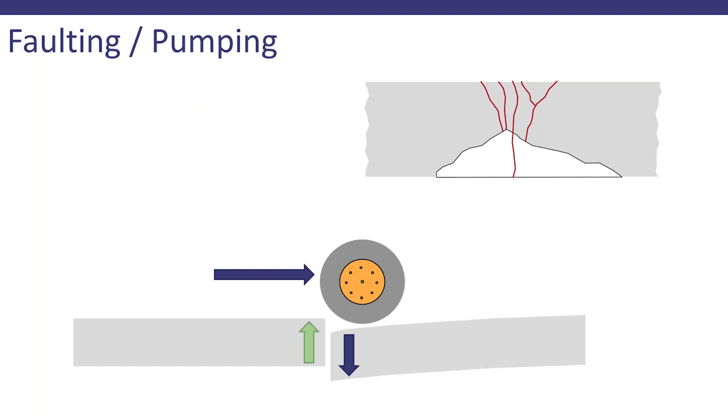That is a loss of material under the corners of those slabs. So when that happens, we know that we don't have the same amount of support at the joint that we have during the mid part of the slab. So that's going to make the road quite a bit rougher at a quicker pace. So faulting and pumping is definitely something to look at.

Scaling is another thing that we have issues with. I will say that you don't see this as much on roadways, but you see it a whole lot on driveways, sidewalks, that type of thing. And typically what's happening here is there's just too much water that got added. Adding water to concrete makes it easy to smooth out, makes it a little more liquidy, easier to work with, but it does not help the longevity.

So what happens then is the water cement ratio is not quite right for what ends up at the surface. So as it's finished off, we've got kind of that thin, watery, pasty layer at the top. And over time, that will just break off. So it's a thin film that wears away, breaks off.

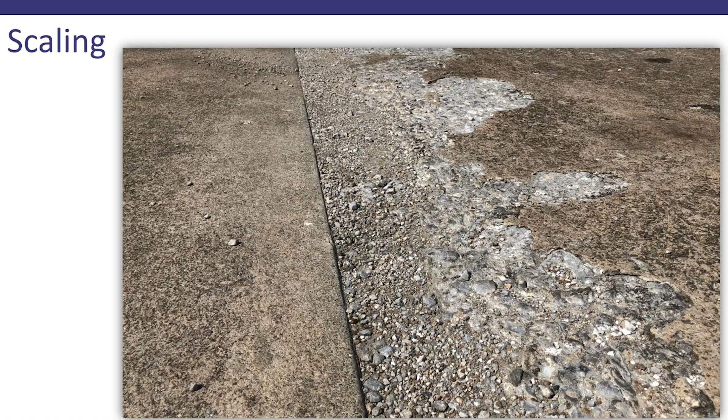Now for concrete repairs, there are a lot of different ways we can fix things. We can do a partial or full depth slab repair. We can rubbleize it, which means totally break it down and basically treat the concrete that's broken up like an aggregate or base. We can break and seat, which means when the material underneath the concrete has worn away and we've had a lot of pumping, sometimes we're better off just to break it into smaller sections and let it seat more completely over that base material.

There are some thin and ultra thin white topping options. Typically we don't see a lot of concrete placed in thin layers because it doesn't tend to last as well, but there are some technologies now with some thinner options.

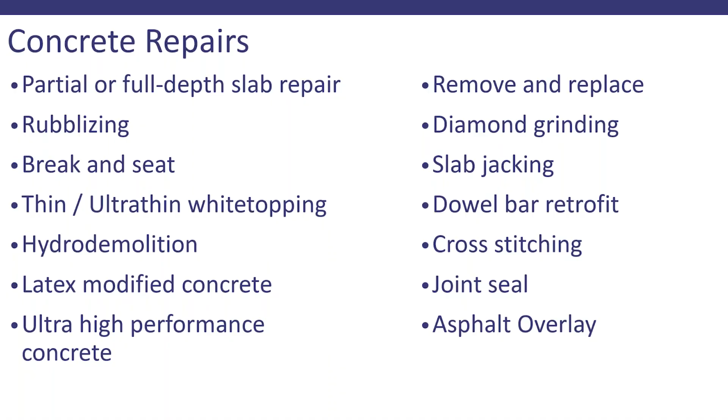Any questions on the concrete section? Okay, no additional questions at this time. Good deal.

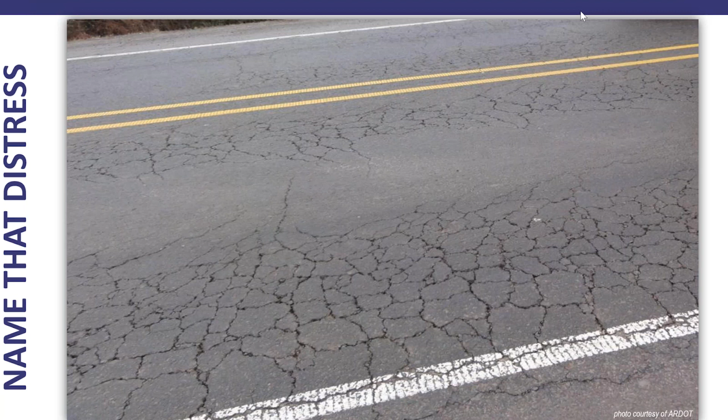All right, very good. Let's see about this next one.

If you were performing a pavement survey, how would you rate this section of pavement?

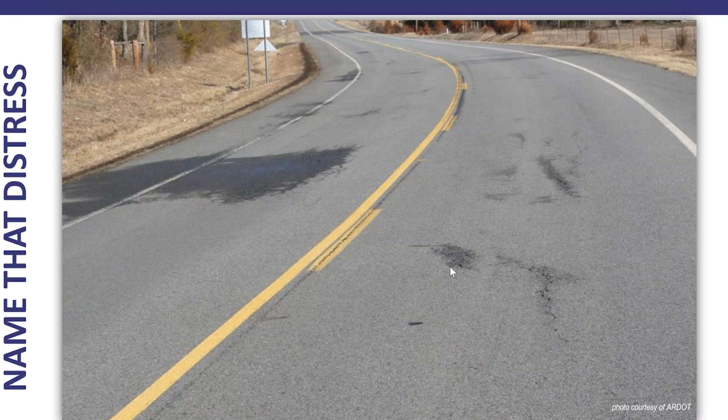All right, and here is another one. Let me know what you think about this one. What distress is it? What severity level? And what density level for what you can see in the picture?

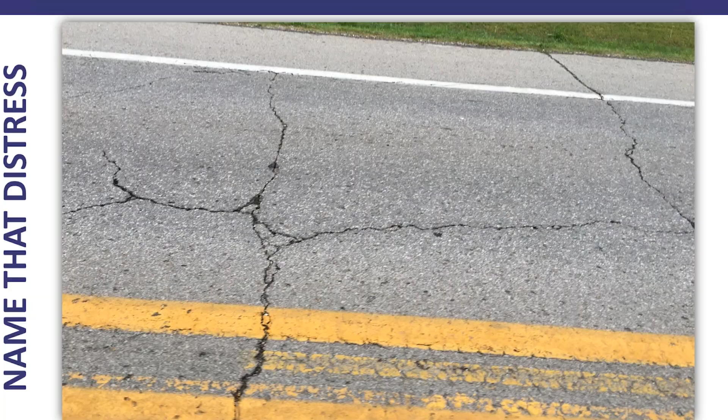One thing I do want to really reiterate is that collecting data is hugely important for being able to manage your overall pavement network. The webinar next week will really expand on this: how do we take that information, how do we decide what to do, how do we fit it into our budget, and how do we make those decisions?

So honestly, of the two, this one was the boring one, but it's the stuff that we need to know, because we've got to have the data to make those educated decisions. So this is how we get it.

Now, do you need to do all of this for every single roadway in your entire network? That means somebody has to go out with their measuring tape and clipboard and take lots of notes, and a lot of us don't have the manpower to take this on. It's almost a full-time job to keep up with. If you look at every single mile of roadway in your network, it takes a very long time, and by the time you finish, it's time to start over and get another measure.

But we do want to get some kind of feel for how well our pavements are doing, how their lifespan is going, how fast they're deteriorating, and when that deterioration speeds up. What's typical? For your typical roadways, you then know what to expect, and can start to set an idea of your timeline for when you need to budget a certain amount for a treatment option, or when you need to completely repave or reconstruct. We'd like to focus more on preservation so there's less need for reconstruction, but we need an idea of how this is actually working with our pavements, and that helps us make better financial decisions.